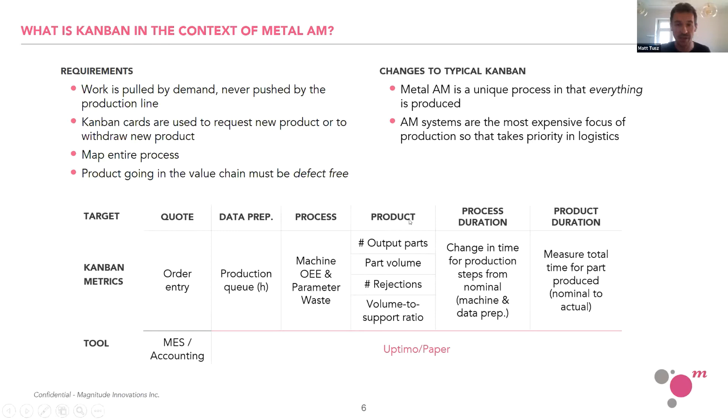As well, like I mentioned, as a first step you could use an MES, and I think you guys know some of them. One question I had was, what kinds of systems are there? Well, there's 3YOURMIND, there's Link3D for additive. Those software packages are still quite young, but I know that, for example, PreciCast uses SAP, and that's fantastic. SAP has been around for a long time, and it can be integrated with other manufacturers, so that's, I think, a very good alternative.

Now, one of the things we mentioned in the last class already is that because of the push method, we have what's called the production queue. So up to that point, what we do is go through step 1, which is customer requirements, the quoting, data preparation, the queue, and then the production process.

We mentioned why we need a production queue, but then afterwards we modify the Kanban style in order to talk about the second thing, which is the pull effect, on the other side of production, where we focus on delivery, quality control, and all the post-processing steps.

So the next thing we focus on is what if there is a mistake? Because as I mentioned, in a Kanban production, you have to have pull, but you also have to have zero defects. So we have to get to that stage as fast as possible, or in the most effective way possible, and what we use is an FMEA. Now, FMEA takes some kind of way that something failed, and it does three things in terms of estimating the importance of it.

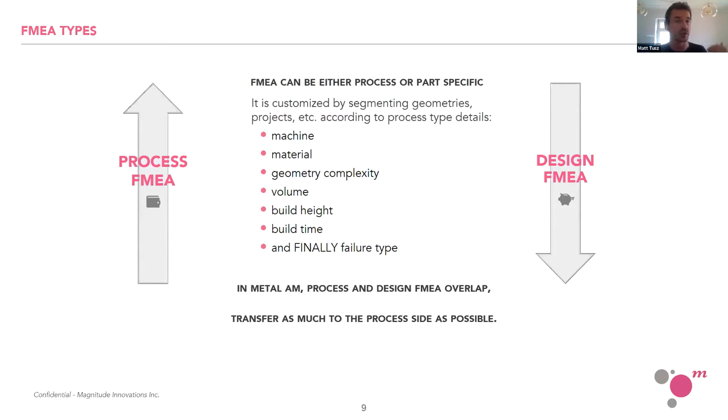But when we bring it over to the process FMEA, we can have a very effective continuous improvement approach where the process we qualify has that integrated into it, and we don't have to requalify our process because we have these subsections for every different kind of geometry, material, or machine. Having said all that, I think that's a pretty decent introduction to the whole idea.

I wanted to get Gianluca's thoughts on this because he has been doing this for a while. They are NADCAP certified, and unlike ISO 9001 or AS 9100, NADCAP is a very serious certification. The reason is that in 9001 and AS 9100, when you don't have an answer to a technical problem, you can just say it's not critical to safety or quality, and you will still get the certification. So a lot of manufacturers, even with that certification, have an extreme amount of variability in their production because they self-decided not to include these technical challenges, which leads to problems later on in production. But in NADCAP, that's a lot more difficult to do, and this is why we have Gianluca today. So Gianluca, thank you so much again, and I'll hand it over to you.

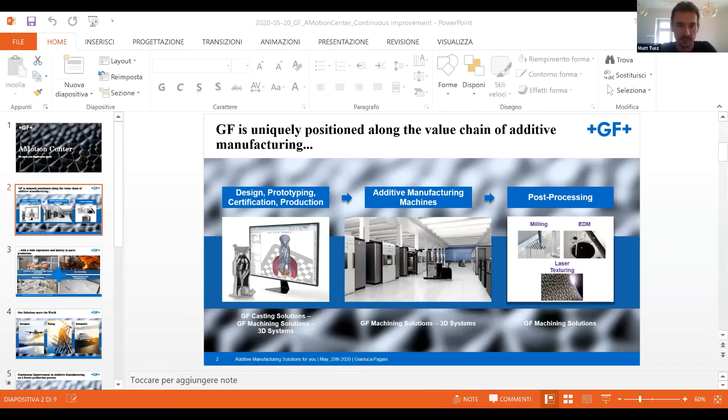First of all, I would like to spend some words concerning my company, GF, and what we are doing in additive manufacturing, just to give a fast introduction and overview of our daily job. We are working between two different divisions out of three in GF. One is the machining solution, a very well-known division known mainly for EDM, wire cut, milling, and turning machines.

We start the collaboration with the customer mainly from the design of the component, because one of the most critical things in the development phase is to have a component that is printable. So we reduce as much as possible the support structure and the technical stuff, making the development phase as short as possible, and giving us the possibility to move to the qualification phase, reducing the number of iterations.

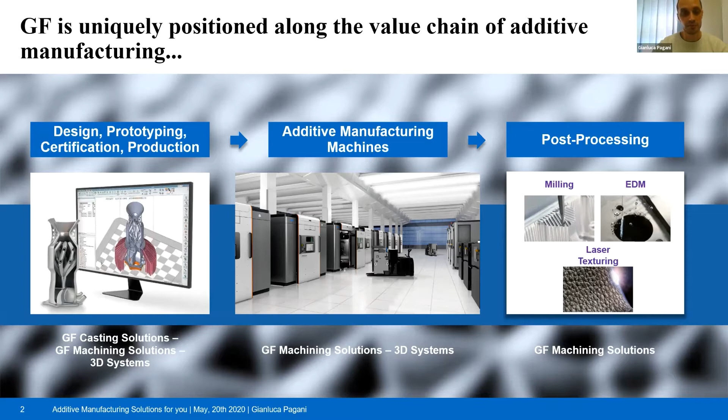As Matt said at the beginning, we consider additive manufacturing a full entire process, starting from 3D printing but including also the post-processing. In this vision, we include in our offer the possibility of milling, EDM, and laser texturing machines, which are important to give the product the final requirements that the customer would like to have.

The other division where we are working is the casting solution. It's again one of the three divisions of GF, and we combine the know-how that we have had for more than 200 years from iron sand casting, aluminum and magnesium high pressure die casting, and precision casting with the acquisition of Precicast, to integrate all the competence concerning the mechanical and metallurgical properties of the material with the post-processing in additive manufacturing.

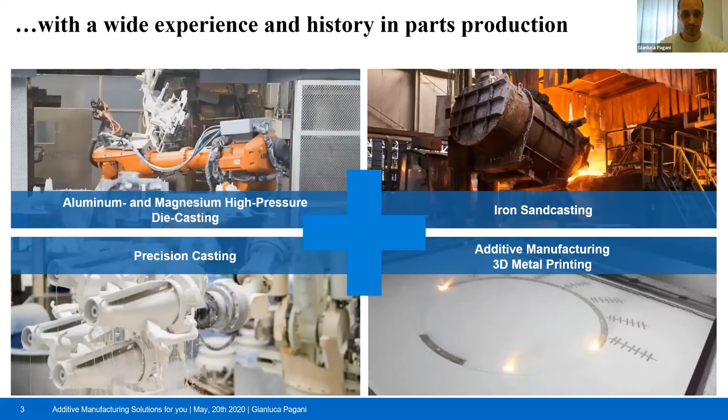Our main fields of application are, as Matt said, aerospace. This comes from our DNA, because Precicast has focused the greater part of its business in aerospace in recent years, and energy as well, where we divide roughly 50% of the market share between aerospace and energy. Then we have some applications in automotive, mainly at the moment in motorsport and racing.

Today I bring one case of a component that has been designed internally to test the initial properties of the machine and what kind of results we can obtain in our process.

I made a comparison between the cost and time for the part itself, so the printing and all the post-processing activities. As you can see on the left side of the screen, the greater part of the costs is related to the printing process itself, because of the amortization of the machines - that's for sure the most expensive part of the process. Then the cost of the powder, which is the second factor, and then the space occupation, mainly the machine hours, loading and unloading, and so on.

But almost 50% of the costs are also related to post-processing. And even in a frozen, qualified environment, you cannot touch your process parameters when we are talking about additive manufacturing.

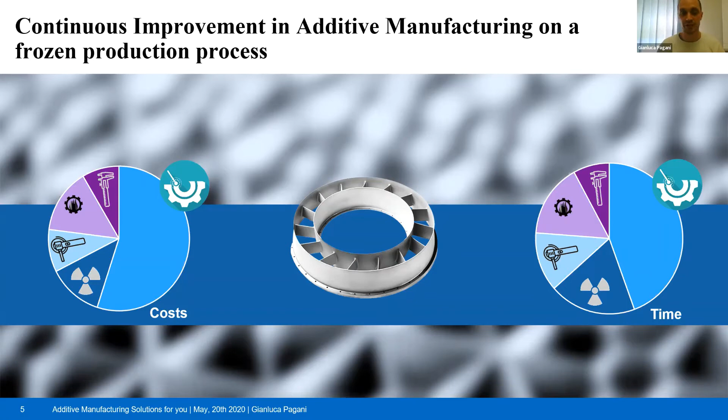And the continuous improvement in this case can be applied in the post-production activities much more than in the additive itself. The first thing that you can work on is for sure the process capability.

Normally you have a customer specification that gives you the limit of acceptance for the non-destructive test. For example, if you are talking about X-ray or FPI, you will have for different kinds of indication a maximum size of defect accepted, while for the dimensional you have a drawing, and for sure you have to stay within it. So this is normally part of the development.

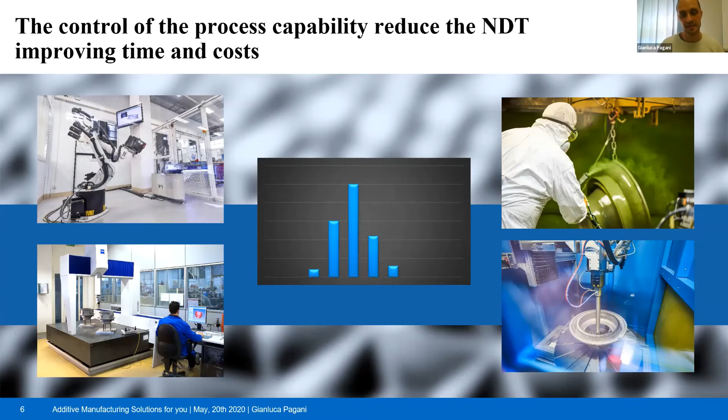But as said, due to the fact you have to collect the data and analyze the dispersion of your process in a real production phase, this kind of stuff is stressed in the pre-production. And so it could be the case that you have to turn again your process into something that you just have qualified. And here is where we start to really talk about continuous improvement.

The finishing operations for sure are part of the process, because of the support removal, especially for geometries that are not properly designed for additive, and where there are some features that cannot be modified because they are functional in the part. Maybe it's a translation of a part that has always been made with a traditional production process and needs to be switched to additive manufacturing because small series need to be produced.

You have just to create the proper support strategy that needs to be removed either by manual and traditional method, or by milling machines, or I put also EDM wire-cut machines.

So something that we have started now to introduce is the concept of milling directly the part on the start plate to remove as much as possible the support, but also to introduce some reference for the final machining, in a phase where you can use the start plate itself as a base plate and reference for the machining. The precision of additive manufacturing gives you this kind of advantage, especially when you are talking about multiple parts.

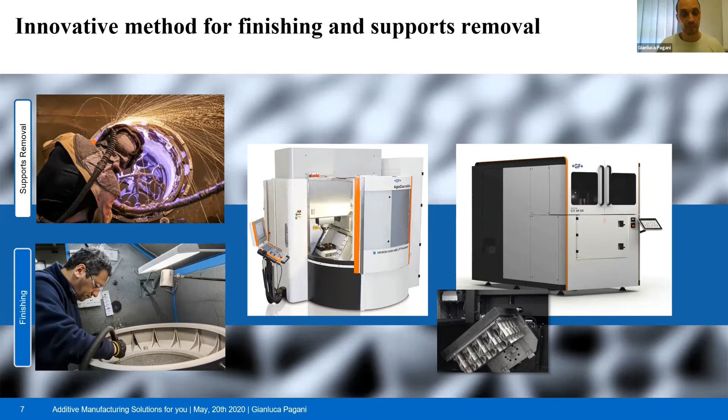The last point that I would like to touch is concerning the metallurgical and mechanical properties, so the metallurgical structure of a component. This is a key topic, because for several kinds of alloys, for most of the alloys, especially if you are focusing again on aerospace, on the nickel-based alloy, you need to perform a series of heat treatment after the 3D printing.

Normally a stress relief to remove the stress from the part and guarantee the separation from the start plate, avoiding cracks for sure. But then some other kind of treatment like solution or aging to give the material the properties that the customer wants to have.

Second thing for sure is the porosity. So you need to stay within a certain range of porosity in an inspection field that is determined by the customer specification. So if you make a section of one part and you inspect the field in an area of, I don't know, 4 square millimeters, you have to demonstrate that your porosity level is within a certain tolerance limit. Sometimes it's reached by the process itself, sometimes it's obtained by subsequent treatment operations like hot isostatic pressing.

What I would like to highlight here is that there are some interesting activities ongoing also from our side to improve the process parameters to give the material the microstructure that you would like to obtain with the subsequent heat treatment. So you can maybe avoid not the full entire treatment cycle, but some steps, to minimize at least the stress.

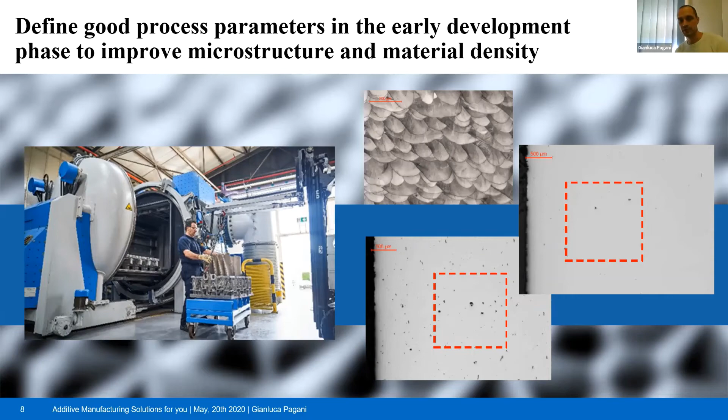And so it's a very important step forward to obtain something faster inside your production. Going back to the previous slide, moving on the dimensional aspect, the capability of the process, the finishing and the treatment, you can shrink both the cost and the time to produce a part without the necessity of requalification, but demonstrating to the customer that you have a frozen process and that you've improved your post-processing to minimize the impact on the quality of the product and on the time and the cost. I think that's it.

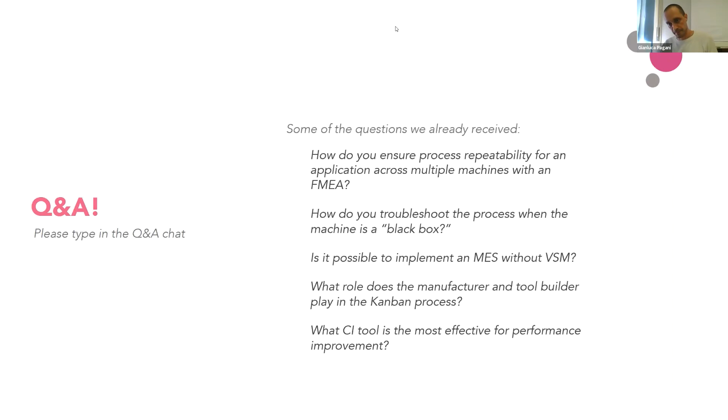Very good, I really like that challenge, by the way. I'm definitely going to get into that in the masterclass next time. But like I said, if you have an FMEA, the basic principle is that the FMEA is a process FMEA, and that's the constraint. Within that process you have subsections for different machines, and as experience builds up, that's how you quantify it. Of course, the first time it is a best guess. That's why we just have a 1 to 10, and it seems very arbitrary, but I really like that challenge.

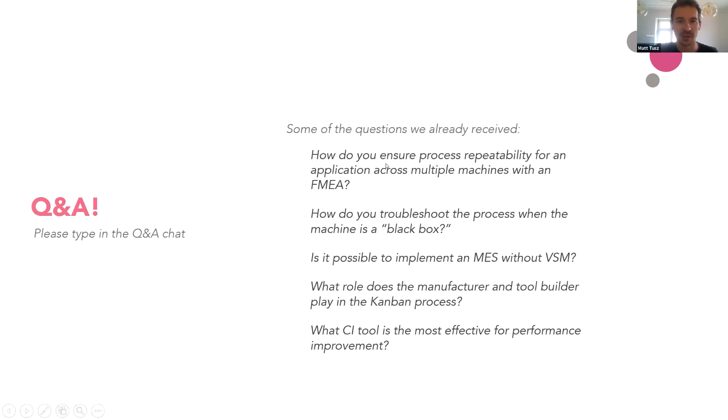You and I will talk about that offline. Gianluca, thank you so much, I hope that wasn't too hard on you. Thanks to you, no, really, thank you for taking the time.